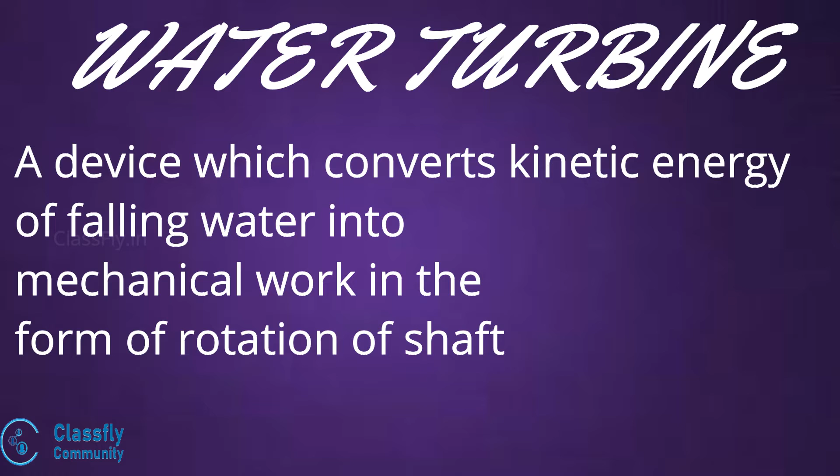Hi guys, today we will study about the different types of water turbines. Well, what is a water turbine? This is a device which will convert the energy of falling water into mechanical energy in the form of the rotation of shaft. This energy can then be used to drive the generator to produce electricity.

Next, moving on to the classification. Well, water turbines are classified on several bases. First, they are classified on the basis of the energy at the inlet. They are classified into impulse turbines and reaction turbines. In impulse turbines, the energy available at the inlet is only the kinetic energy of the water. In reaction turbines, both the pressure and kinetic energy is available at the inlet.

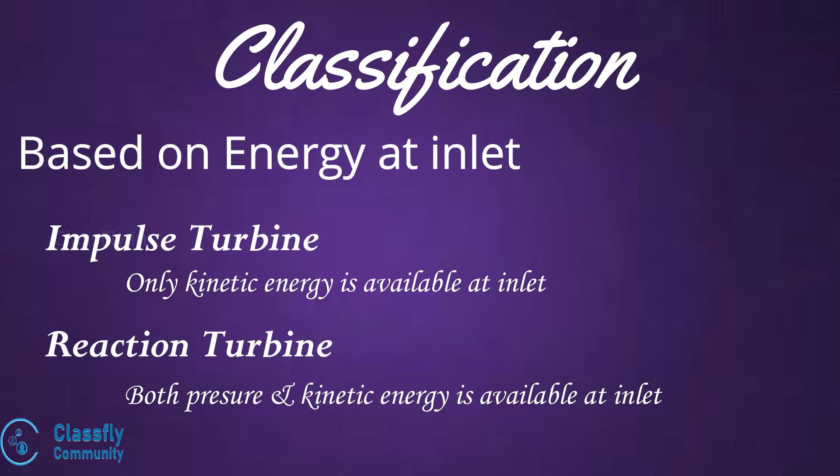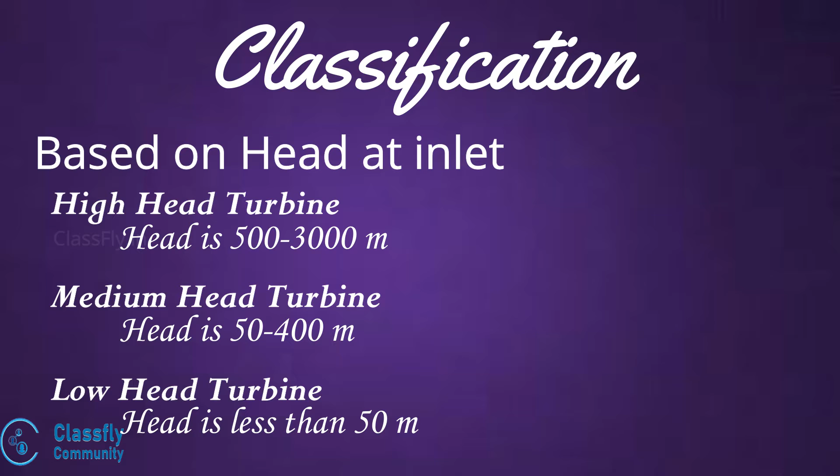Next, it is classified on the basis of head at the inlet of the turbine. Well, head is nothing but the vertical height between the surface of the turbine and the water reservoir. Here, it is classified into high head turbines, medium head turbines and low head turbines. In high head turbines, the head of water at the inlet will range to a height from several hundred to a few thousand meters. In medium heads, the head of water will range from a height of 50 meters to 400 meters. And in a low head turbine, the head of water will have the height in the range which is less than 50 meters.

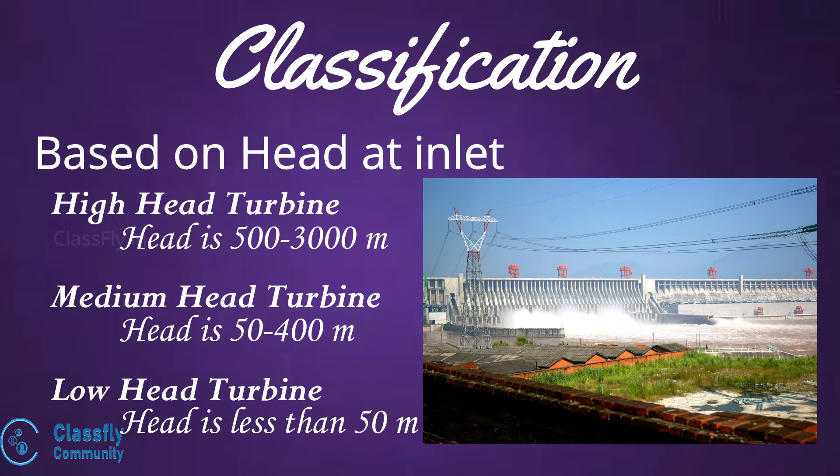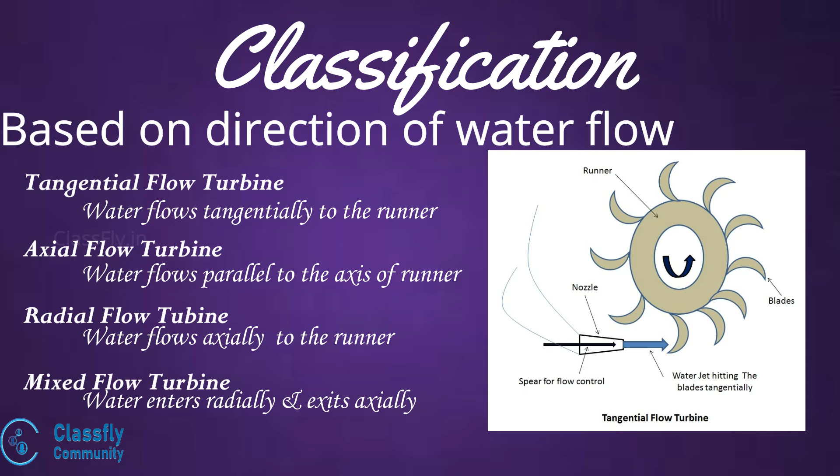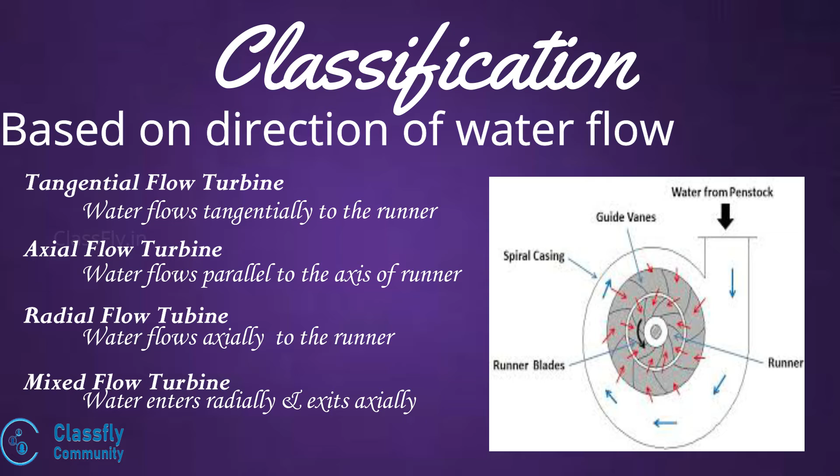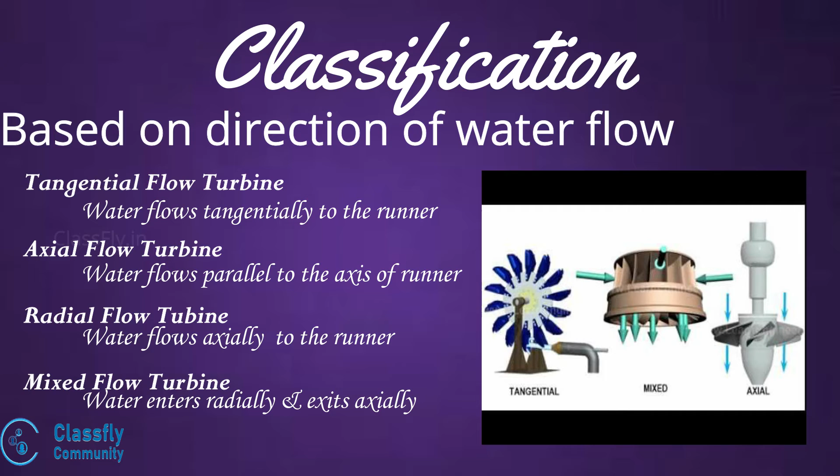Next, it is classified on the basis of the direction of flow through the runner. Here, it is classified into tangential, axial, radial and mixed flow turbines. In tangential flow turbines, the water will flow along a tangent to the runner. In axial flow, the water will flow in a direction which is parallel to the axis of the runner. In radial flow, the water will flow in a radial direction through the runner. In a mixed flow, there will be the combination of two flows, that is, the water will flow radially into the runner and will leave the runner axially.

Next, let us study the construction and working of a Pelton wheel turbine. Well, this is a tangential flow impulse turbine which is used for high heads of water. This consists of a nozzle which is attached to the penstock. The penstock is actually a large pipe which will carry the water from the reservoir to the turbine. The nozzles are arranged in such a way that the water coming out from it will fall tangentially to the circumference of the runner wheel. The speed and flow of the water in the nozzle is controlled by a spearhead which is operated by a hand wheel. Next, it consists of runners and buckets.

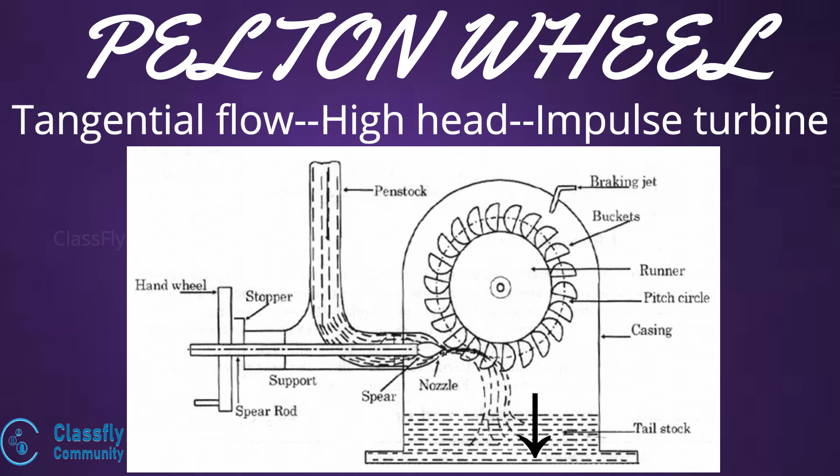Well, runner is a circular wheel which will have a series of evenly spaced objects known as buckets which are fixed around its periphery. These buckets will have a bowl-like shape. Next, it has a turbine casing. The function of the casing is to prevent the splashing of water and also help in the discharging of water into the tail race. The tail race is a path through which the used water is pumped out for irrigation and other purposes. Now, let us see how this turbine works.

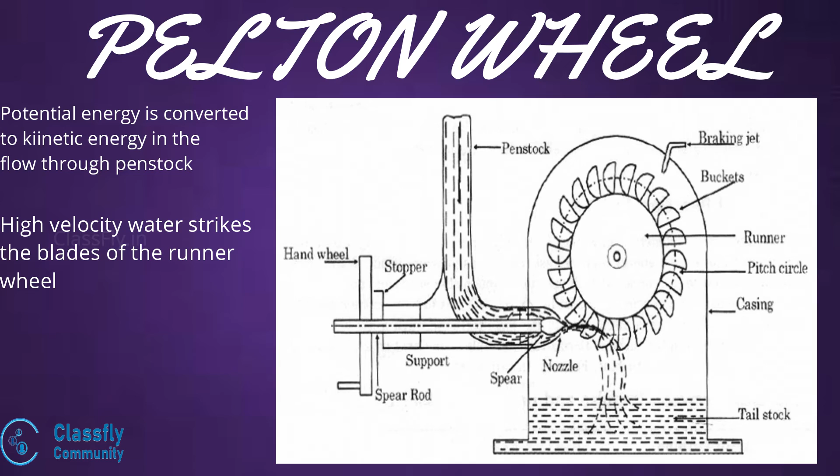Well, water from the reservoir will have potential energy stored in it. As this water flows through the penstock and enters the nozzle, the potential energy of the water is converted into kinetic energy. Hence, the high velocity jet of water coming out from the nozzle falls on the curved blades which are fixed around the runner wheel. When the water hits the blades, there will be an impulsive force set up due to which it will set the runner into rotary motion. Hence, the shaft which is coupled to the runner will also rotate, thereby driving the generator to produce electricity. After this, the water is freely discharged into the tail race.